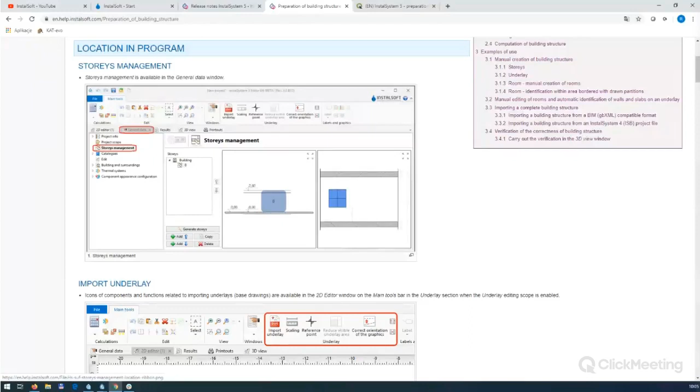An important aspect of getting started with our program is the extensive use of our InstalSystem 5 help online, which we call just the help system. There is a very wide knowledge base of our modules, tens of articles prepared in the most popular languages, which are detailed instructions. Maybe I'll open this one, preparation of building structure, which contains descriptions, photos, and video from the program.

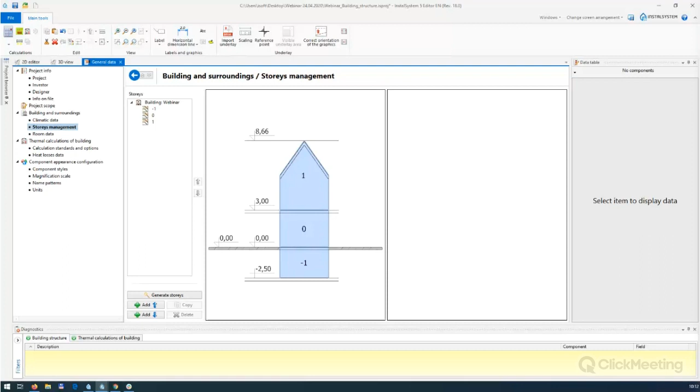Okay, we come back to the storeys management. Here we define the number of stories, the arrangement, and the data for individual levels in the data table on the right.

Entering ordinates can be done in two ways. You can directly enter ordinates for a level, for example in this field. Second, you can also define components of stories, for example the height of the stories and the thickness of the individual slab.

Based on today's underlay, I've already defined three levels which have the appropriate data.

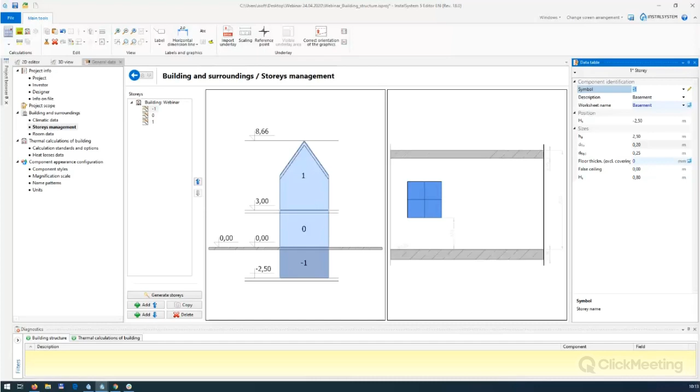Another important aspect is room data and switching, depending on what our design goals are - so calculation according to coefficient, and what interests us, calculation according to standard, which is associated with the full building structure.

Here at this point we decide on the basic aspect of what this project is for us. If we want to make a project based on coefficient, then the building structure generally does not have to be calculated. This is because for some projects, these values for terminals don't have to be calculated and can even be entered.

In this situation, we talk about the room layout. We do not need horizontal and vertical partitions. The room layout is only rooms with the value from the coefficient or an entered value. So in this situation, we need basically only the underlay and the rooms.

Okay, however, the full building structure includes all these elements like stories, rooms, horizontal and vertical partitions, sub-partitions, building units, windows, doors, openings in the slab or wall. And it's important that the full building structure in our program must be calculated. This is the main difference.

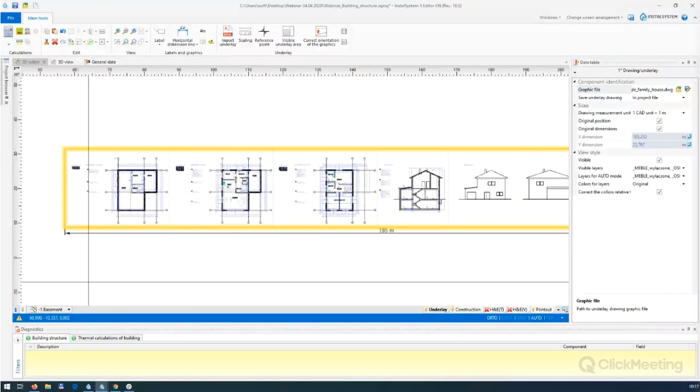In practice, this underlay should be loaded using this button and scaled using the data table by this field, for example, or the scale button. Now I hide this underlay with the visible underlay area. I'm on the basement, so I click on this one in this way.

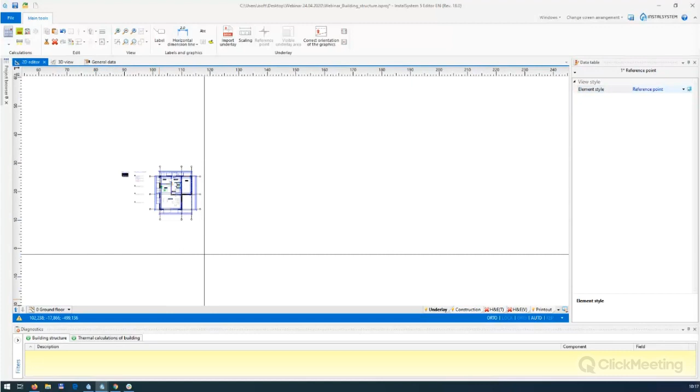And second, I put a reference point on each level in the right place. Okay, the last one. I come back to the basement, and that's my floor.

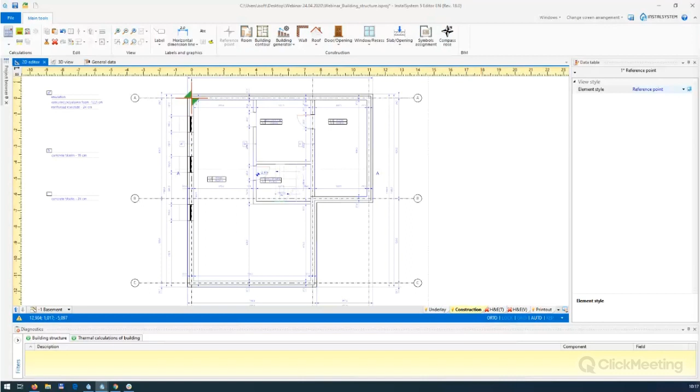Now we move to the next stage. Please note that my toolbar has changed. In version 18, we've set icons according to our recommended usage path.

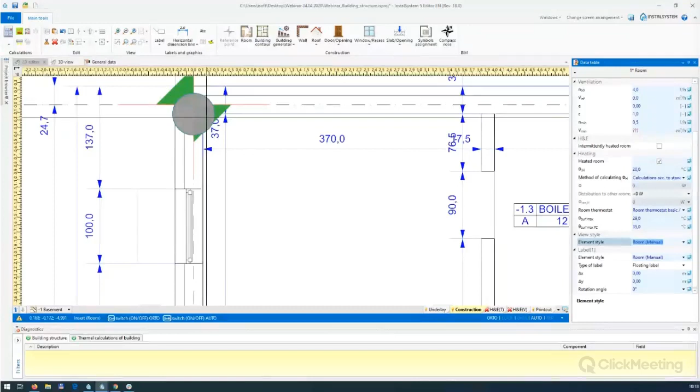The most time-consuming stage at the moment is inserting rooms. It requires manual work. We click on this icon. But we have also improved the possibility of inserting rooms diagonally, done this way.

Using the F3 key calls the same function. After drawing these rooms, I can choose a different path to set the heat calculation of the rooms.

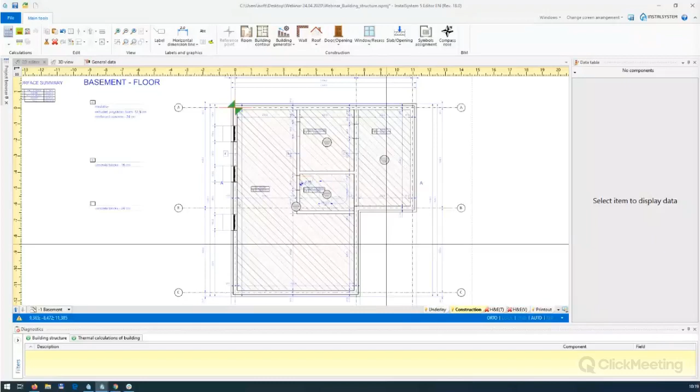So maybe this one. In the data table, I can enter the value manually or calculate by coefficient. The program automatically calculates the requirement based on this coefficient for heat and cold, and for this choice, calculations are not required. Look at this.

However, we will calculate using a calculation according to standard.

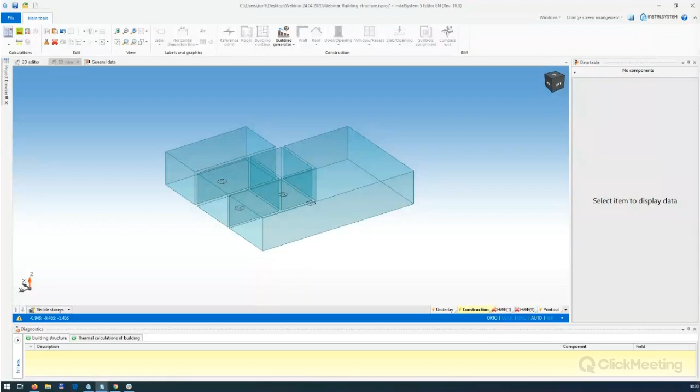After the first drawing of the rooms, we should make the first verification, a 3D verification, to check if these rooms do not overlap. I recommend turning on the edges because then everything is visible. And if the design goal is to calculate by coefficient, it's basically everything about the structure of the building.

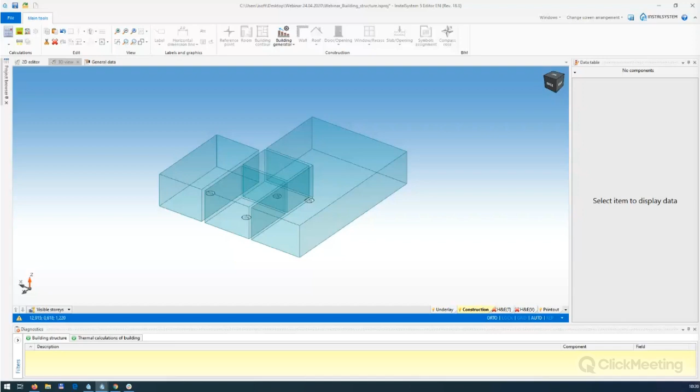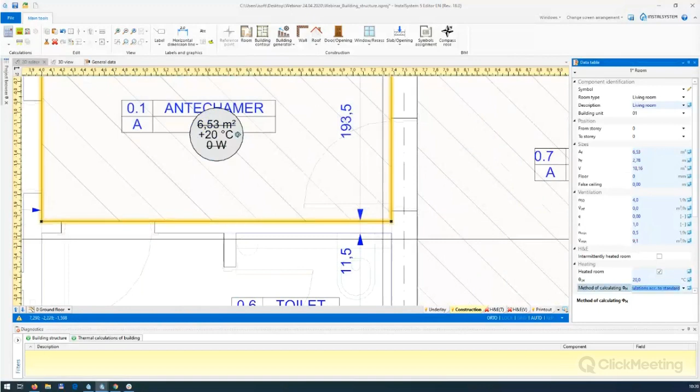Just draw the rooms. I will now quickly add the remaining rooms on the other floors. So I go to the ground floor and the room, the first one. The F3 button calls the same function.

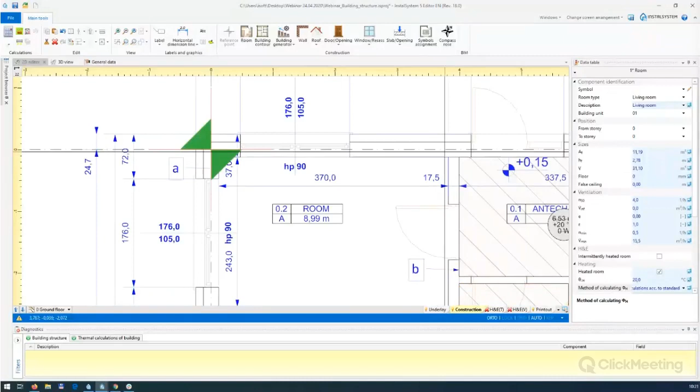It's a different shape, so I need to go around. Please see how fast it goes. I think it's very simple and quick.

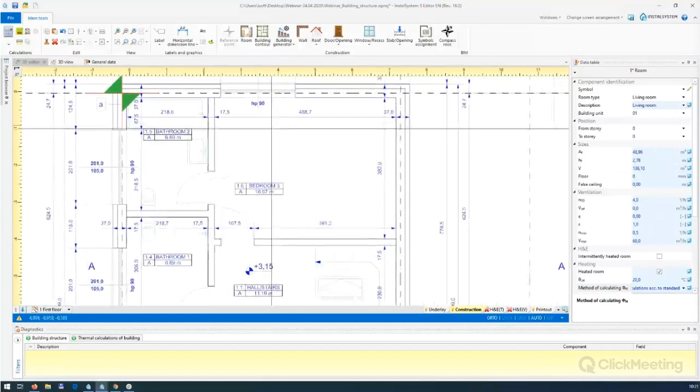So I insert the rooms, the last floor in my project, the same function. The last two. Such a single family house takes about a minute.

I go to the 3D view. These relationships through the reference point are correct. And this is all if we do not have to calculate building structures according to standard. However, we will now use these rooms in our project and make it possible to create partitions.

Here you will meet some news in version 5, so let me discuss them in more detail to make it understandable for you. I'll switch the project for a moment for this. The first one: what you see in the aquamarine, or celadon, color in 3D—orange in 2D—is the attribute of a manual room with the possibility of changing its shape. It cannot itself be used directly to calculate the heat load.

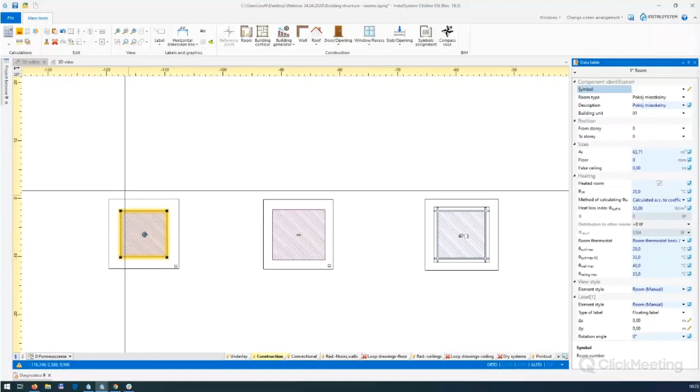I'm informing you now about what the program presents to us. We already have it in our project. These rooms should be used to create partitions, and then the result of this horizontal and vertical partition will be an automatic room. This room is blue, both in 2D and 3D.

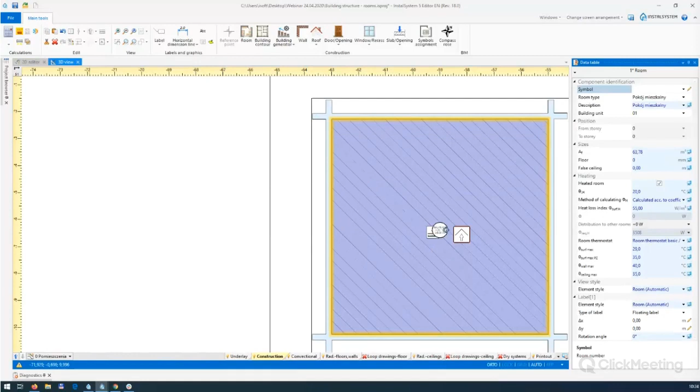Here it should be noted that it's the result of the surrounding partitions, and we will receive an automatic room. That's one. There is another attribute of creating automatic building structure: the building contour, in purple. This is an element of automation. This is important because you may have a mix of manual and automatic rooms.

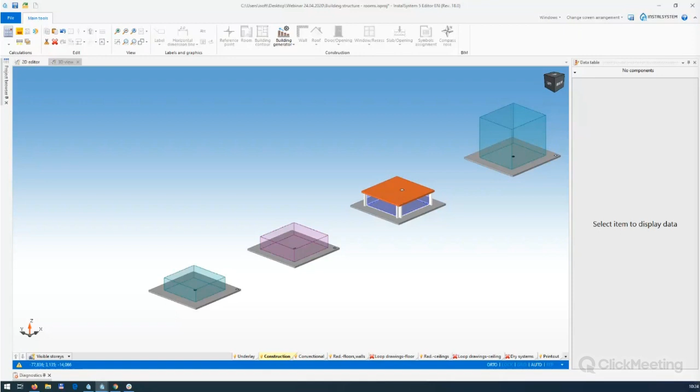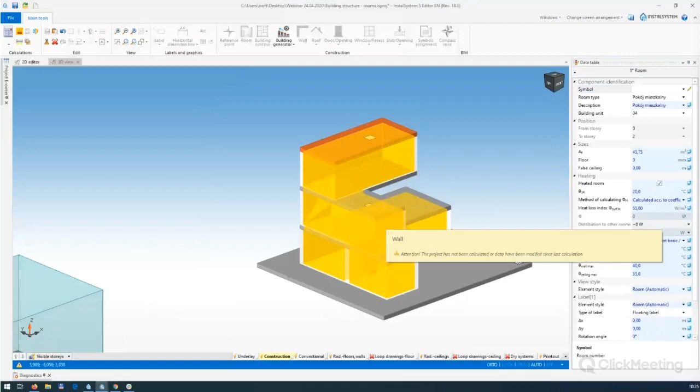Today, we will also receive a multi-story room. This is a manual room, from 0 to 2, and automatic rooms. Look at this—we will do this through holes in the wall and holes in the slab. This is the whole scope you will meet within the rooms in InstalSystem 5.

Okay, we come back to the project. So we now go to the basement, and we begin the construction of the full building structure. We will make a situation where the program automatically generates slabs between levels and walls. In this case, we use the building contour on each level and just make the contour of this building.

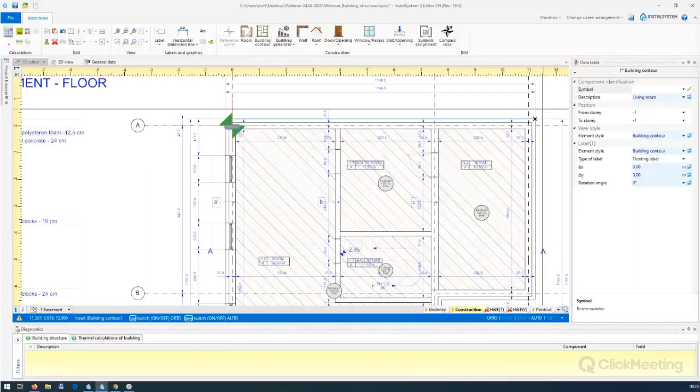Okay, the last one. If the levels have identical contour, I can change the position of this building contour.

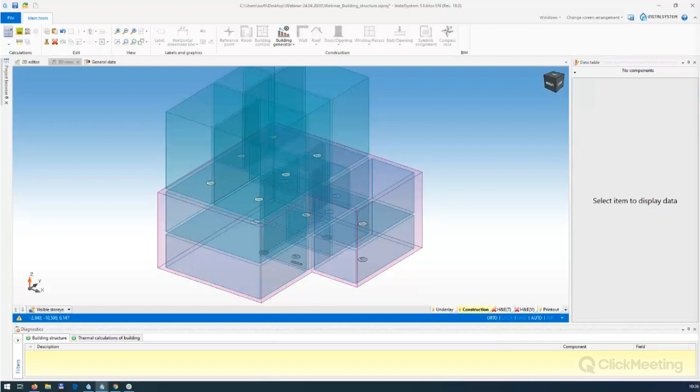Then I insert the building contour for the last floor. So I go to the last level. Just make this.

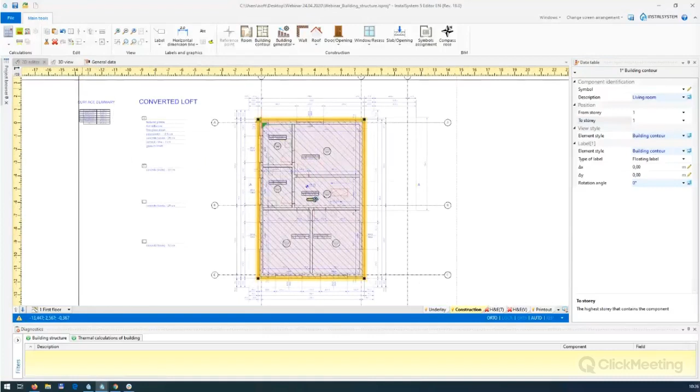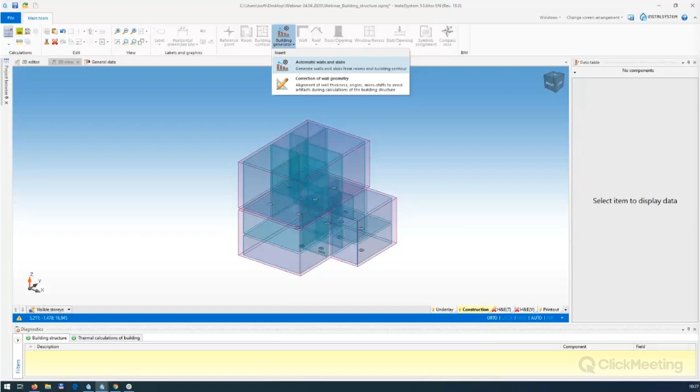And now I use our function which we call automatic walls and slabs. The icon is in this place. The effect of using this function is quick, also for very large buildings. So look at this effect. And now we have all the walls and slabs.

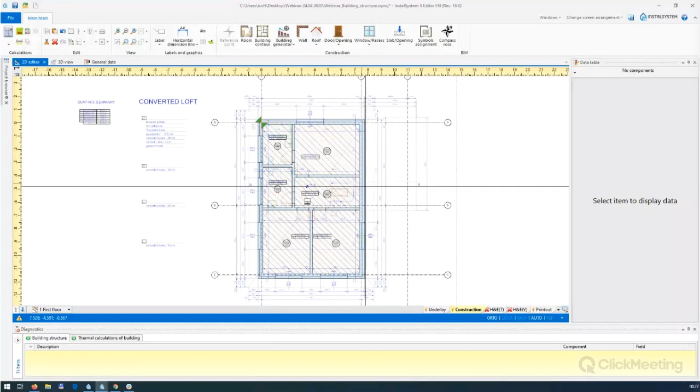At this stage, I can do for the first time a building structure calculation to check the entire building. So I come back to the 2D editor. You see that I have the walls. So maybe this one. Okay. And now I do for the first time building structure calculation. Okay, look at this.

The most common message that you will now meet is that there are rooms in the project that have not been generated automatically. When we now turn off the walls in the 3D view, it's easy to see which rooms are manual and automatic. I remind you that manual rooms cannot be used for heat load calculations. Diagnostics inform us of this and send us tips. There are also other diagnostic messages which I will talk about in a moment.

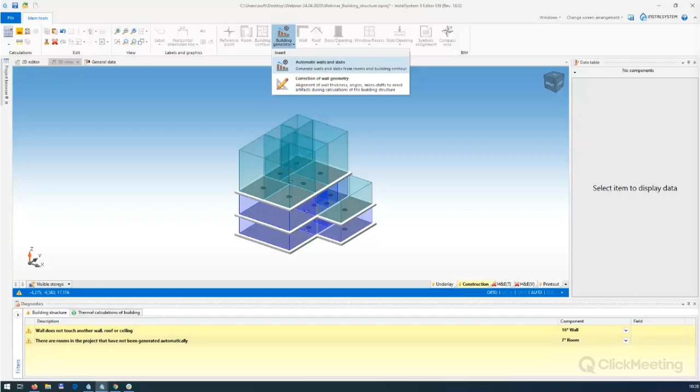Okay, why did this happen? Because the room is not closed. We must remember that the automatic walls and slabs function does not form the roof element.

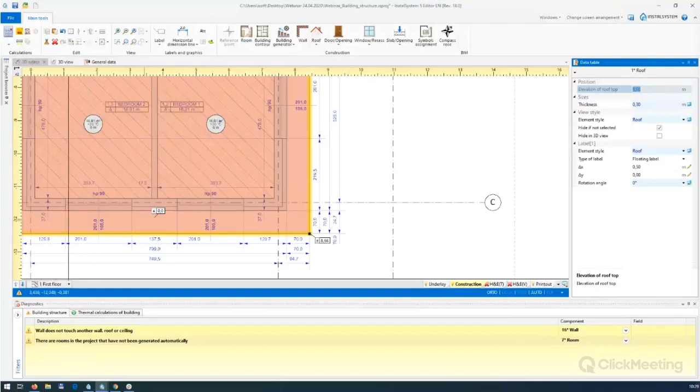I'm on the first floor and insert the roof element using the icon. And I also put the roof element above my garage. Okay, now by building structural calculation...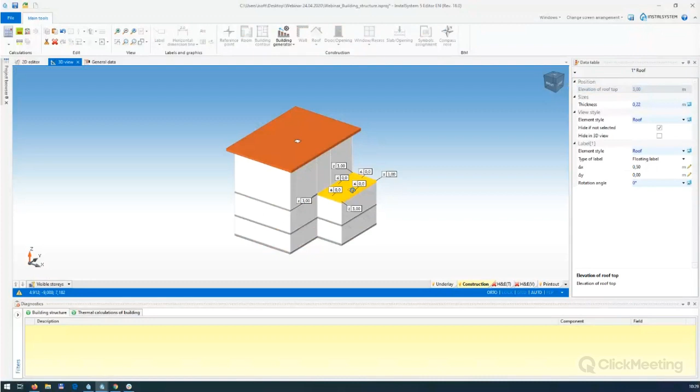I have no diagnostic messages and all rooms are automatic. Okay, it can be used for building thermal calculation.

And now we will try to make this project more attractive. We will do it and I show you what possibilities we have in this aspect in our program. So the first one, I can switch. The first thing is partitions. Here I show basic possibilities.

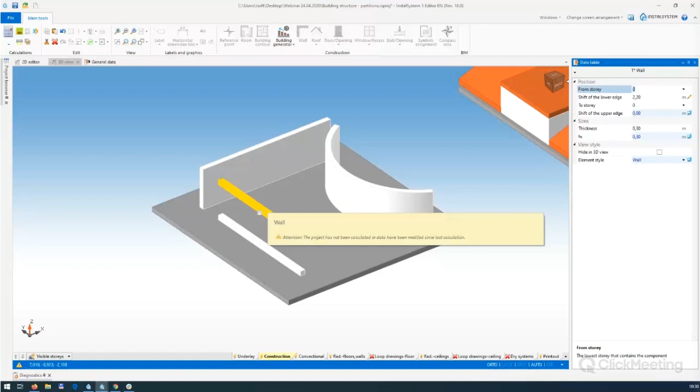We can, for example, turn off and on the wall in the 3D view. We can move the bottom or top edge of the partition. It can also be an arc. We also insert the wall using this icon.

And the wall also has important attributes for its modification. For example, this icon, it's the beginning. I think we'll discuss at another webinar exactly what this means.

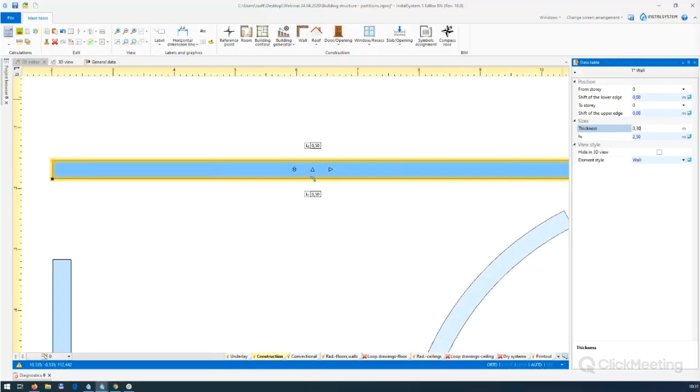This and this, it's the attachment point. I note here that the walls in InstalSystem 5 do not have to be connected to each other by the center axis of the wall. This hot point decides, for example, where the increase will be when I change the thickness of this wall. Okay, for example, 40. It goes to the opposite side.

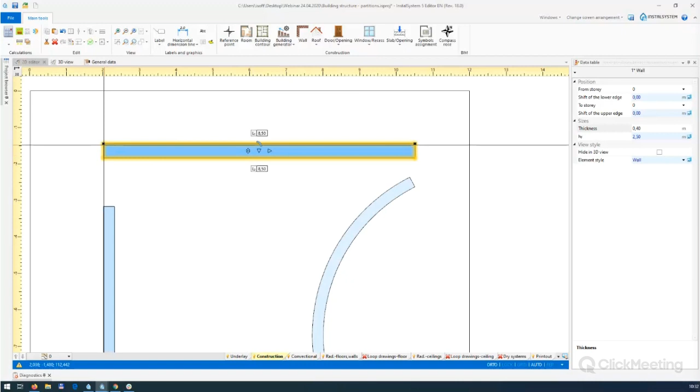The way it's positioned, it's this button. The hot point decides where this wall will be reflected in the mirror. Okay, look at this. Yeah, when you change the hot point in the other way, and the arc.

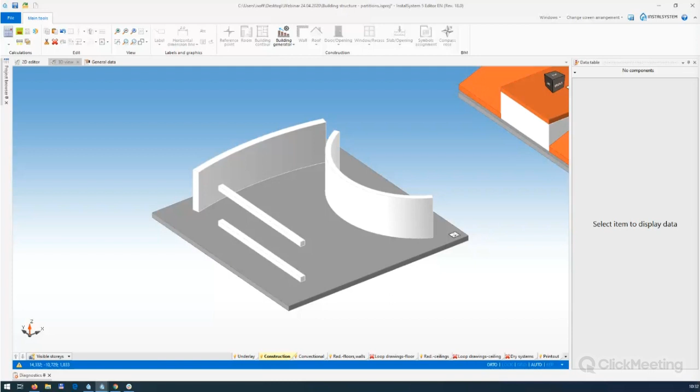The last one, I just show you. Okay, we are not interested in this roof at the moment. However, along with the walls, we have also developed extensive diagnostic messages in version 18, which I would also like to quickly show with examples of how to work with them.

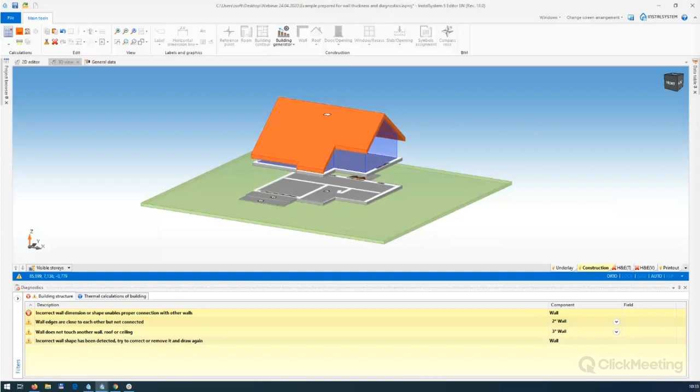Okay. I prepared some project for you. This one, okay. I have prepared this, which, as you can see, has a whole spectrum of diagnostic messages and no automatic rooms. Okay, I go to the construction and hide all walls, so I don't have automatic rooms on the lowest level.

The diagnostics most often occur due to no precision in the design process or not good enough underlays from architects. Keep in mind that you can meet them, but they are very easy to remove, and the program informs us.

First, remove the errors. The first one: incorrect wall dimension or shape unables proper connection with other walls. I go to the 2D editor and simply click, and we can remove this wall. Okay, in this way. After removing the error, you need to calculate the building structure again, because another error may be covered by another. Okay, you see, overlapping walls are incorrectly connected walls.

Look at this. The first one, the second one, we remove such a wall. Okay, and again I make a building structure calculation. Now I don't have errors, but I don't have automatic rooms.

The next one, wall edges are close to each other but not connected. We could simply connect these walls.

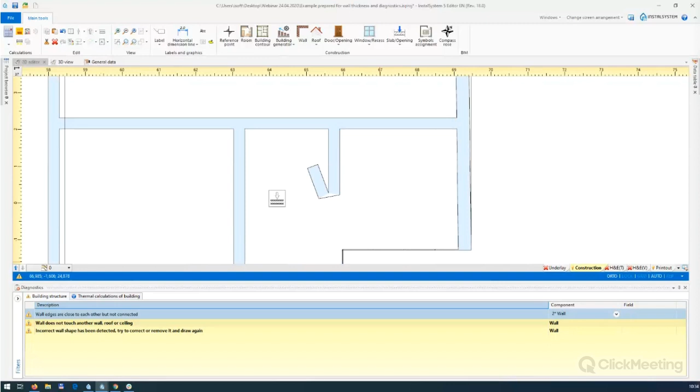The next one, wall does not touch another wall, roof or ceiling. I go to the 3D. Maybe I change this one. Look at this, here we can see that the slab does not touch the wall.

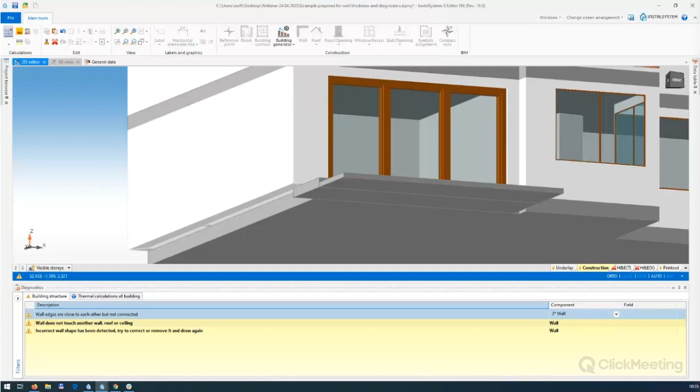This message also diagnoses roofs. It also shows when the walls are not fully covered by horizontal partition. I simply go to the 2D editor and move the slab.

And the last one, incorrect wall shape has been detected. Try to correct or remove it and draw again. I delete it or modify. I do building structure calculation to check the project.

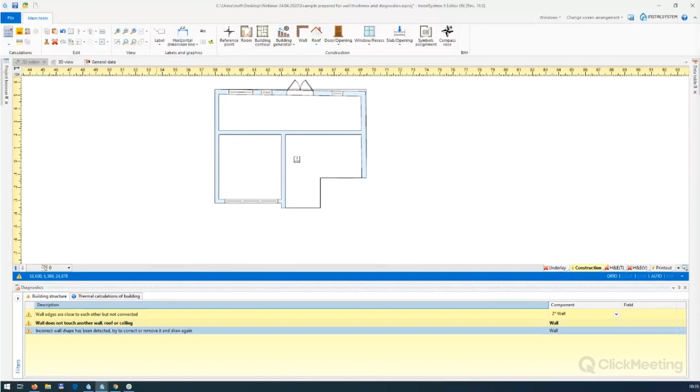Okay, and now you see the automatic rooms. Another component is the new correction of wall geometry tool.

It's a powerful tool that can correct walls and thickness. I think that we will discuss them more closely in the next Edu materials. I will use this tool to automatically correct this wall.

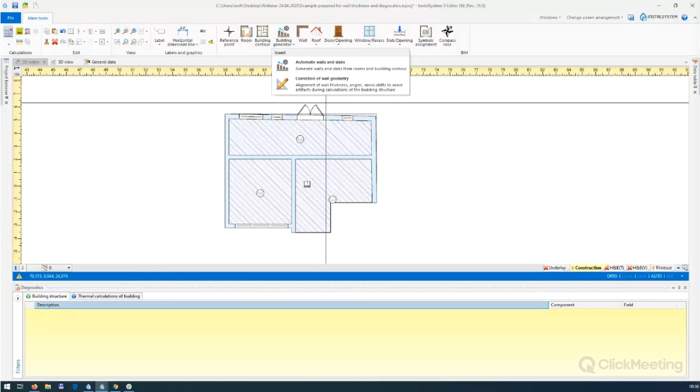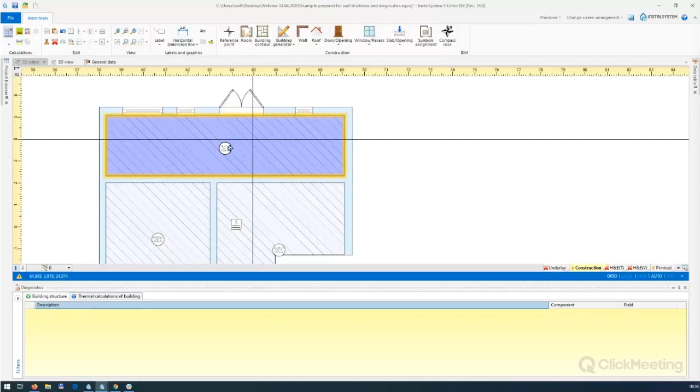This is a quick demonstration of what you can meet while working with InstalSystem 5 at the stage of already generated partition.

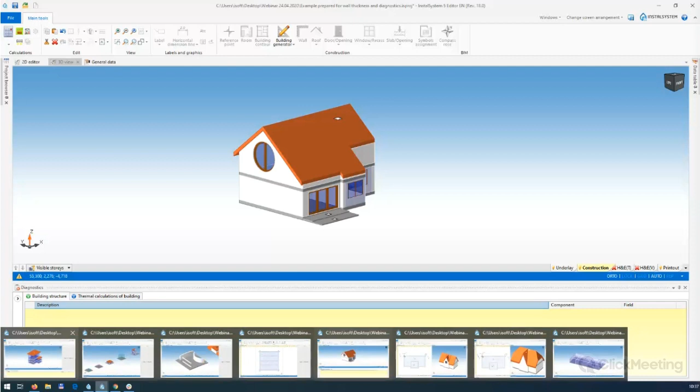Okay, we are coming back to our project. After getting automatic rooms, we insert the hole in the slab element to generate a multi-story room.

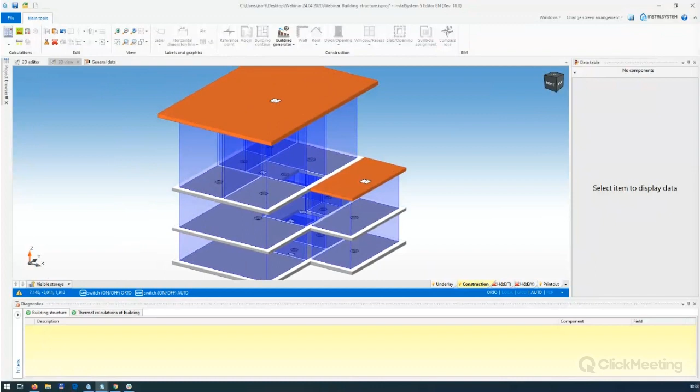The first one will be in this place, and the next one will be in this place. Then we have a hole in the slab, and after inserting and calculating building structure, we have this effect.

We have this effect. We will be able to do the same thing for rooms for the hole in the wall element. In the data table, we will check that we want to connect these rooms, but we must remember that manual rooms cannot connect in this way.

Okay, the next stage will be inserting windows, doors, and roof modeling. And here we've prepared another sample for you. It's this one. Yes, okay. This is all done in our program.

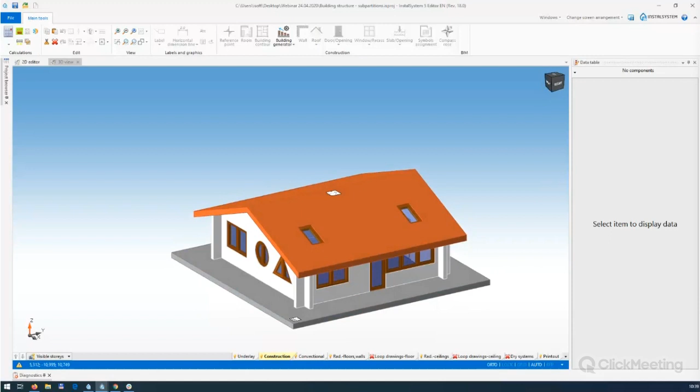We will start with windows. As you can see, this building structure can be very attractive. Each of these elements can be defined in the data table. In this one, although it's not an architecture program, here's an example of windows.

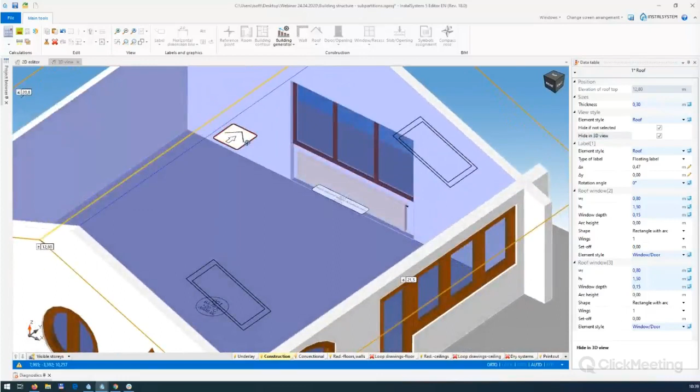Recess. I can click on the roof, hide in 3D view, and look at this. We can, of course, create a window recess as a separate element. Okay, that's the windows.

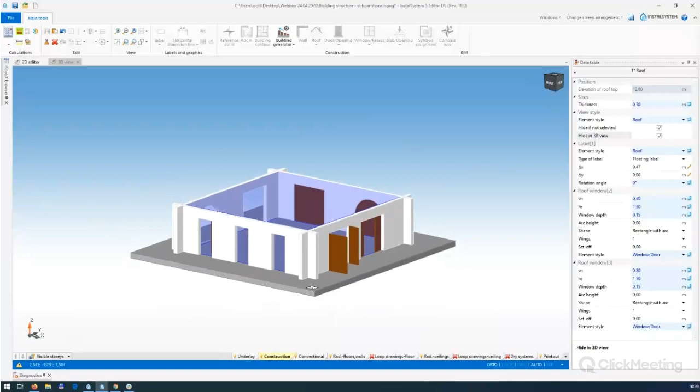The next story, this one. Here are some examples of doors and garage doors program, for example sliding doors and the wall openings. We can set everything in the data table.

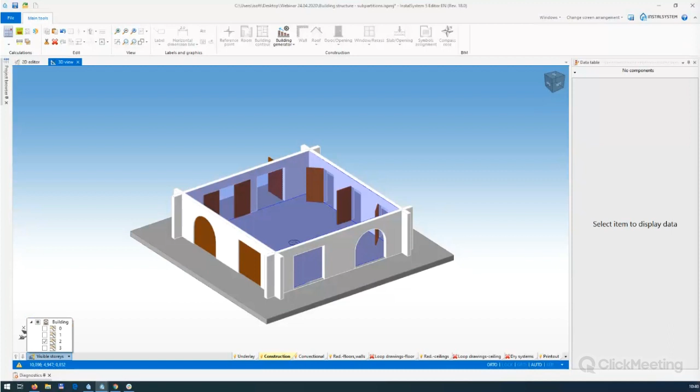Okay, the next one is construction beams. Important, if we arrange something on the ceiling, the program sees that there is a wall here, so it may be easier for us to arrange, for example, a production hall.

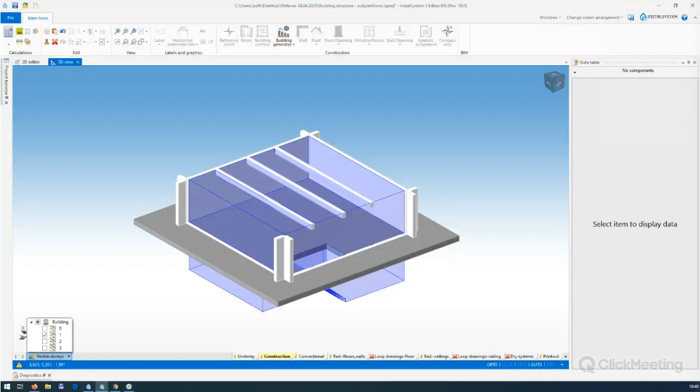And for the end, this one, stairs. This is not an independent element in our program, but it can be created using partition. Okay, that's all the spectrum in our program.

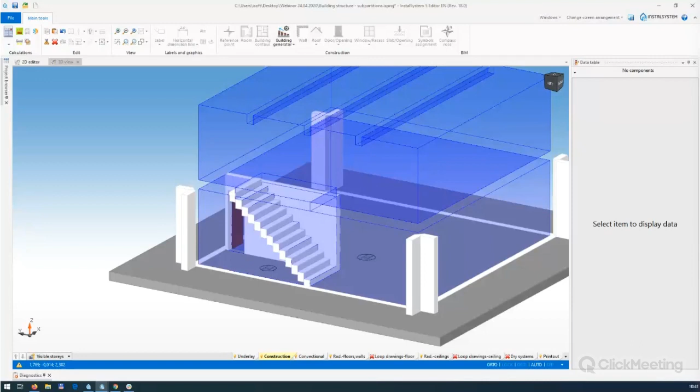We come back to our editor. So now I go to the last level. We work with the roof.

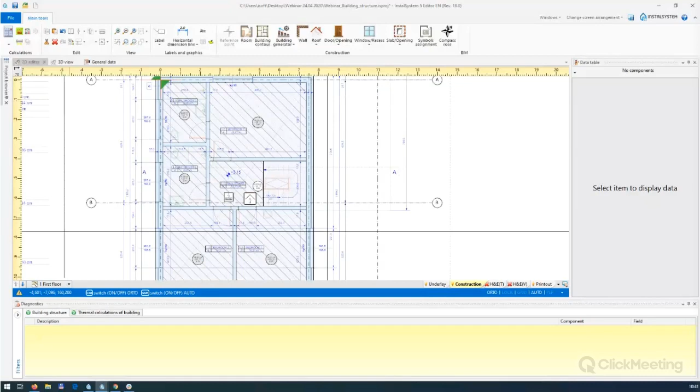We can give the data in editors or determine the roof slope if we know it from the underlay. So maybe I go to the medium, and when I go to the roof, I can define the level in editors or by the slope, for example 15.

Okay, we will create a roof for the last floor divided into 4 parts for our main roof. We can do it with the add roof edge tool. Okay, first one, the second one.

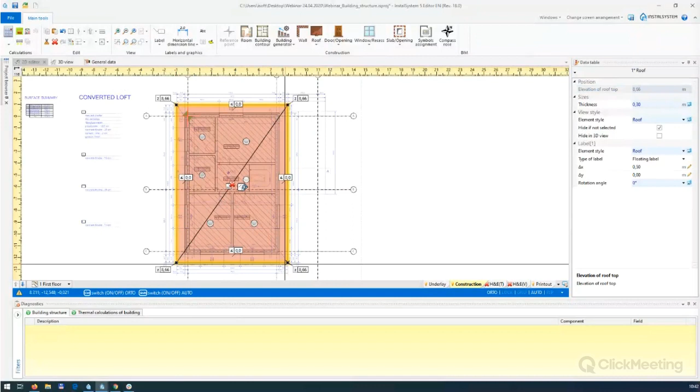Okay, I can change the levels on editors, for example for maybe 7. It's important that we do not shape vertical partition. Only the roof automatically cuts them.

Here we can give this data, of course, also on a 3D view. Data specified to roof, for example, slope. And when we calculate building structure, look at this effect.

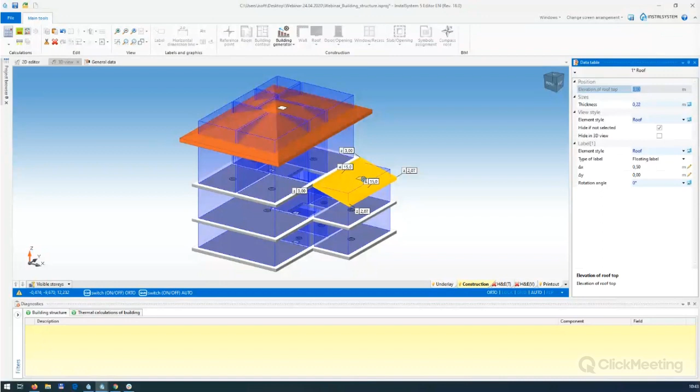And I present all the walls. We do nothing about shaping vertical partition. It's important to correctly define this value for the last floor, this value at the beginning in storeys management.

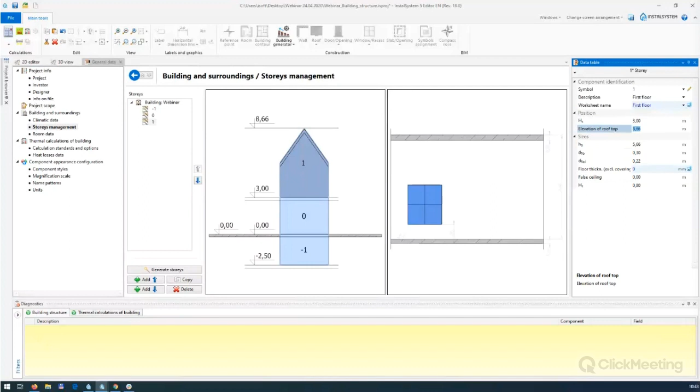On level 0, inserting doors and windows is very simple. We just put it on the wall. I will not place all these elements because of time. It's important that each element has the possibility to declare position using the editors.

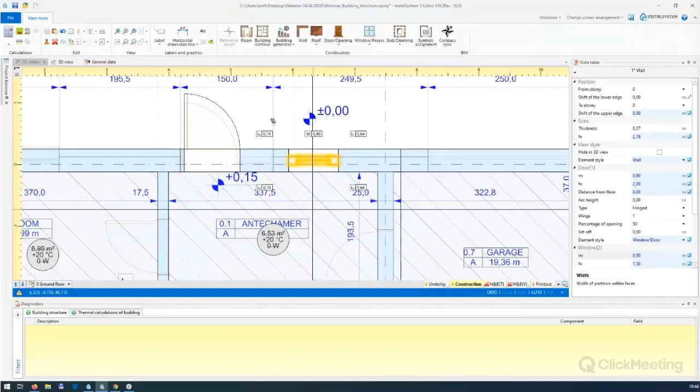Maybe I go to level 0, okay, and let's show a new window, the project browser. This one and this one. Here you can see all the rooms. The first one will be numbering the rooms.

Of course, you can do it manually in the data table. I will do it only for the one floor. Symbols assignment, I'm looking for 0,1 and 1,2,3. We have this room together, so I go to 4. This is 5, but it takes the number from the room below. So I go to the toilet, double click, and 7.

Now I can change this symbol manually to 0.5. I can change the room type here. The project browser allows you to navigate the project very easily, so I can change this one, and that's the next one.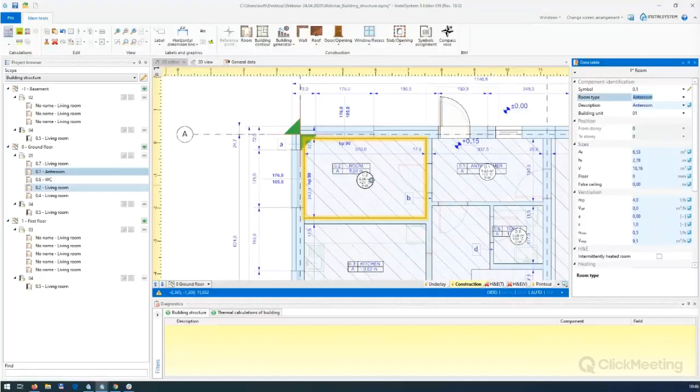That's maybe bedroom. Yes, it's a living room, and that's a garage, but maybe it's other.

And the last thing is building units. They are set up automatically, 1 unit per 1 level. It's important for you to set them in the program by yourself.

So the first one, the second one, the third one, and just delete the rest.

All rooms on this level are assigned automatically, but it's important for you to set them in the program because building units is an element that controls ventilation airflows. As part of building units, this balance is made different.

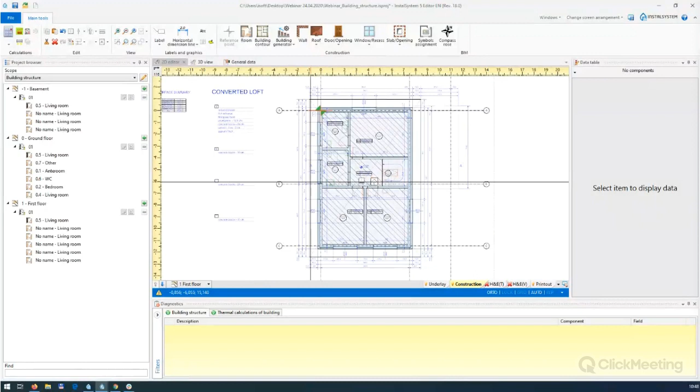Okay, and now this is a correctly created building structure that I can use to make the heat load calculation. I think this will be material for our next educational materials, how to make the thermal calculation for such a project. And this is all for this project.

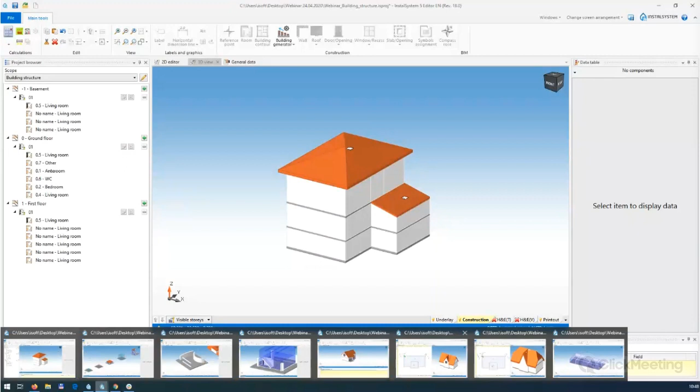And finally, to make it fun and show our program's capabilities, I will show you what roof cases we can design in our program. For example, the first one - these are simply dormers that we insert with this icon. Roof and dormer. This is a dormer.

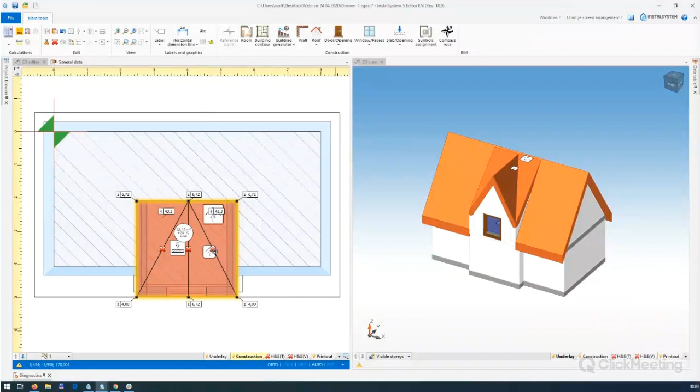We use them to model the roof, which automatically generates walls under this dormer roof. Details on how to create these things are in our help system, but I have a second project for you.

For example, this one, it's more complicated. Everything is possible in our program. I go to the top floor and you can see how to make this kind of roof, together with a dormer. That's the roof and that's the dormer.

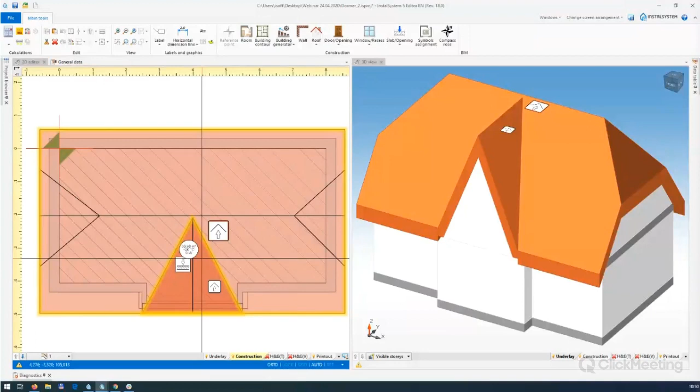As I said before, details on how to create these things are in our help system. You can find it in this place. When you go to our help system, you can find creating of roofs with different constructions.

I have a second project for you. Yes, an example of a production building. All this is created in our program. It's about, I don't know, maybe 10, maybe 15 minutes of work in InstalSystem 5.

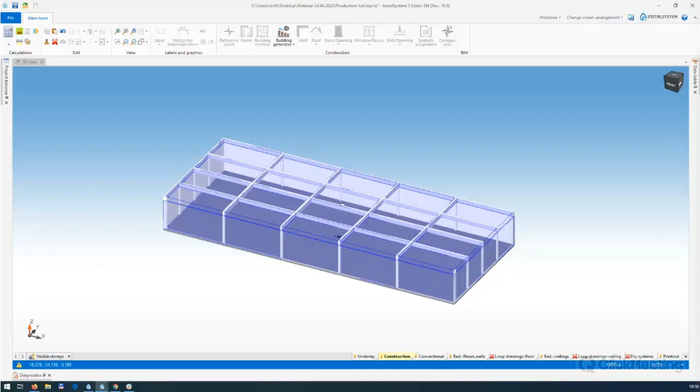And for the end, I have some example. I need to find this one, please give me a moment. Maybe I open the project, go to the IFC. Okay, and here I have an example of a project made in IFC format, which is the building information modeling format, made in an external program and imported into our program. Please wait a moment.

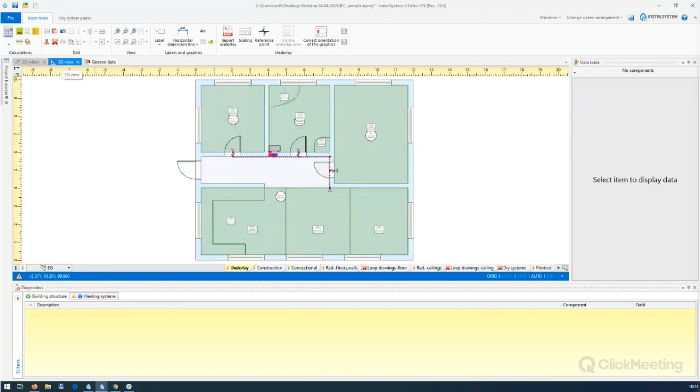Okay, and now I go to the 3D view, construction, and look at this. Maybe I hide all the walls in the 3D view.

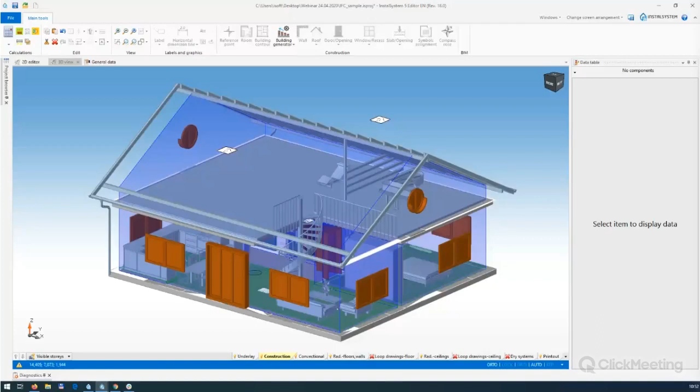We don't need the diagnostic. We are working on improving this module, IFC, but such things are already possible in our program. It's also an element of the building structure that can be used for heat load calculation, and as you can see, for example, for installation design.

Okay, I can change the visibility. Not the stories, the second one. Yes, and you can look at this. You can design the installation and calculate the heat load on the IFC format at this moment.

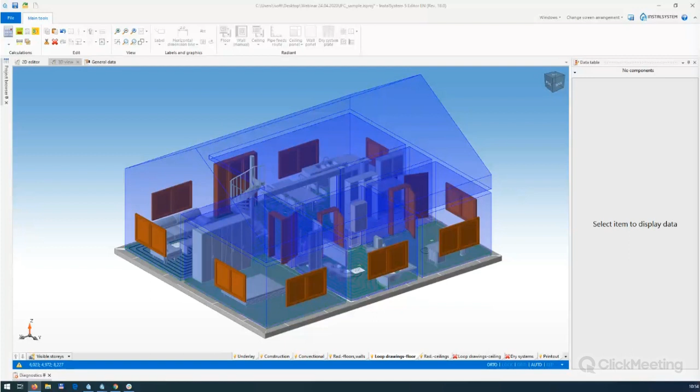How can you do it? Go to the editor, go to the floor, and you can simply insert supply and return. So in InstalSystem 5 you have two different ways: you can draw it manually, or create them automatically using pipe feeds routes. Okay, I will check our chat again.

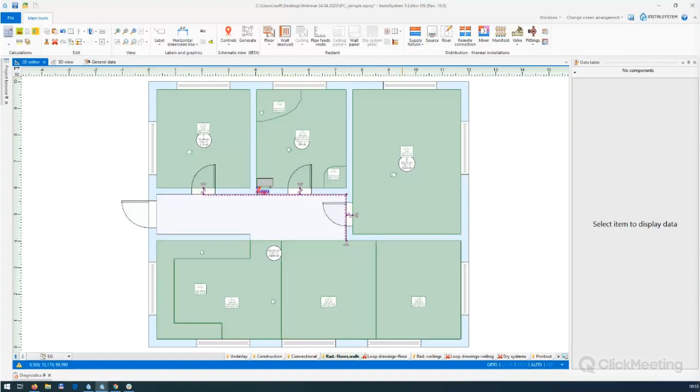Yes, I have a question for Messia. Is there a possibility for a heated floor system to increase the amount of watts per meter? Yes, you can do it. All this information you can find in our help system, on how to declare this, for example design of radiant floor and wall installation and the heating and cooling zone.

This is a very wide topic about how to create the installation in our program, so maybe it will be the next topic of our webinar. But yes, of course you can increase the amount of watts per meter.

I have the third question, from Krzesimir. Cooling load calculation, will it be available? Okay, yes, we are working on it. It's a project that we want to show you maybe next year. I don't know exactly, but we are thinking about making a full cooling load calculation.

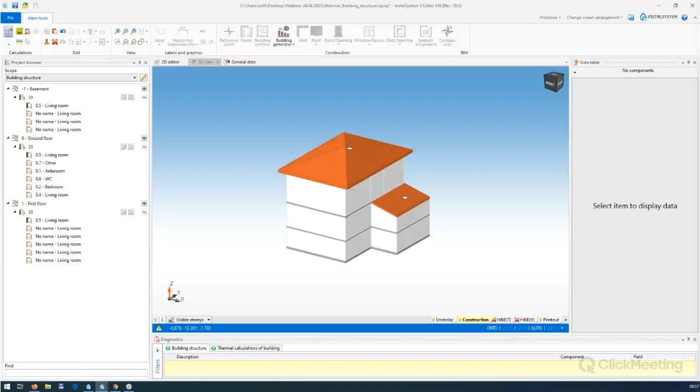Okay, I have the next question. Could you show how to use heating load calculation from version 5, from version 4, in our program? I think that it will be the topic of the next webinar.

Okay, we don't want to talk about heat load calculation today. We have prepared the full building structure, and this project will continue. I think it will be the next webinar where we talk about heating load calculation. So if you have this kind of question, we'll talk about it in the next webinar.

I have the next question. When I make the building from IFC and the architect changes it, can I import and change my building from the new IFC? Okay, I understand that the architect changed, for example, one wall. The IFC format you saw, it's the prototype form. I don't know exactly how it works now, but I think that in the future, of course, it will be possible.